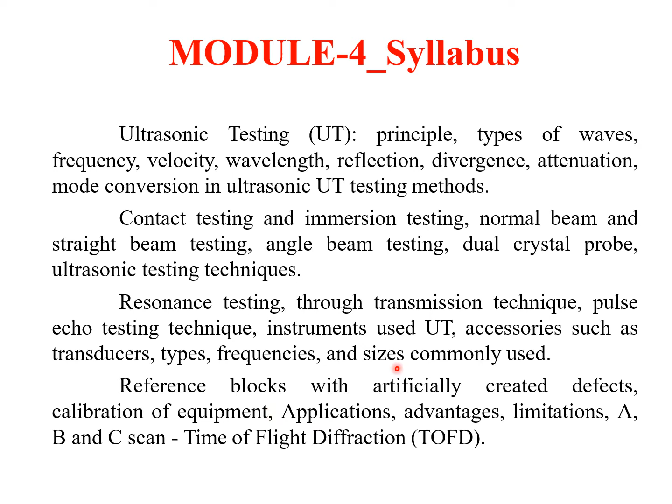So in the previous videos we've been discussing details about ultrasonic testing methods, and we covered the different types of ultrasonic testing methods like resonance testing, through transmission technique, pulse echo testing, etc. Now in this current video lecture, we'll be discussing more about the other different methods such as contact testing, immersion testing, normal beam and straight beam testing, and the different types of scan or the result interpretation, and also the accessories and instruments that are used in ultrasonic testing methods.

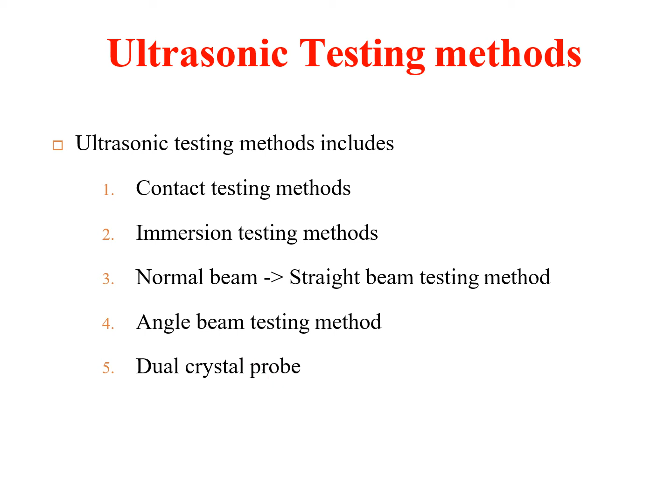Now, the different other types of ultrasonic testing methods also include contact testing methods, immersion testing methods, normal and straight beam testing methods, angle beam testing method, and dual crystal probe. First, we can move on to contact testing method.

In contact testing method, as you can see, you have a transducer here. The transducer is placed on the surface, and the transducer and the surface are separated by a layer of fluid. A thin fluid layer is provided between the transducer and the object, so as to remove the air in between them, so that better sound signals can be transmitted.

So in the contact type, as the name mentions, the transducer will be in direct contact with the object, but it will be separated slightly by a thin layer of fluid. That thin layer of fluid is acting as a coupling. It helps in better transmission of the ultrasonic waves into the test specimen.

Now, all the elements are actually protected inside a rugged casing. You have a very strong casing inside which all the transducer components are placed, and the wear resistance is very high. In order to improve the wear resistance, we have used wear resistant materials inside and also on the surface.

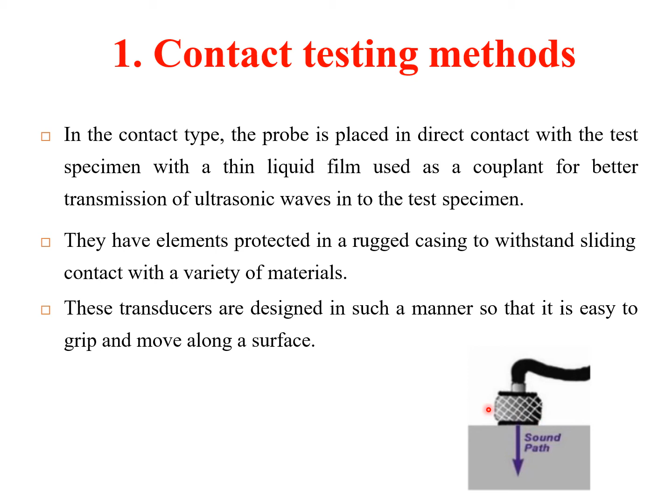Now the transducers are designed in such a manner so that it is easy to grip the transducer and move it along the surface, separated by a thin fluid film. Now we move on to the second one, which is called immersion testing method.

As we have mentioned before, in contact testing method, a couplant or a liquid is always provided, so that the air gap occurring between the transducer and the surface is removed, so that the sound waves can be transmitted better. So in immersion testing method, a waterproof probe is used, and it is placed at a certain distance from the test specimen.

This method provides better coupling. That is, it is immersed inside a fluid, so there is better coupling, and the strength of the ultrasonic signals that are transmitted can also be improved. So the main advantage is that they have uniform couplant conditions, so that longitudinal and transverse waves can be generated with the same probe and can be transmitted with the same intensity through the specimen.

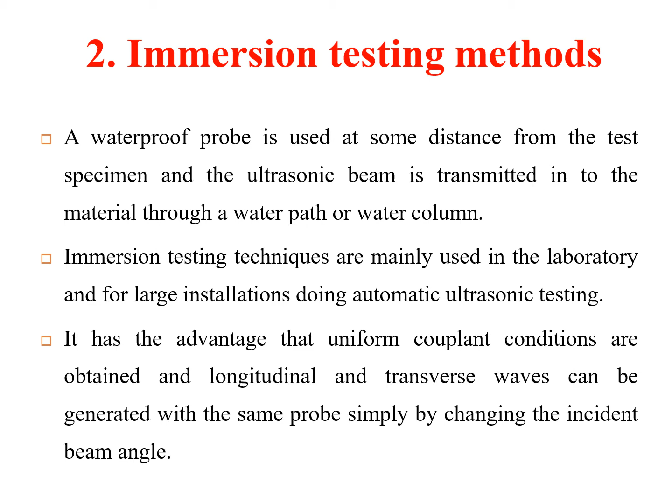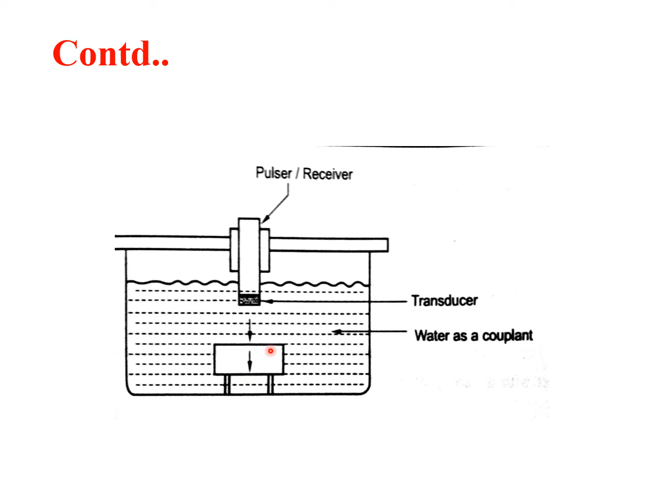Now it is used in cases where large installations are there, or also for laboratory techniques. This is the immersion testing method. You have a transducer which is waterproof, and water is acting as the couplant. This helps in removing the air so that sound signals can travel better, and transverse as well as longitudinal waves can find defects inside the specimen. Now we are moving on to the third method, which is the normal beam testing method.

Now, one of the issues with this is that not all defects are parallel to the surface. There can be defects which are inclined to the surface. Using this normal beam testing method, it is difficult to completely analyze defects that are inclined to the surface. So this is one of the main disadvantages.

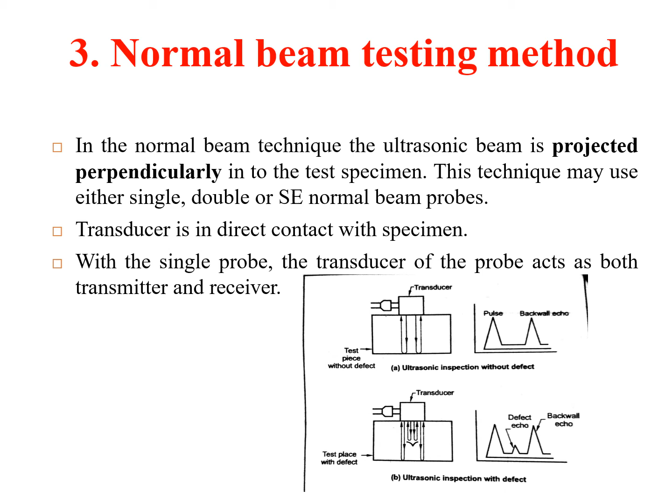Now here, the transducer of the probe is acting as both the transmitter and the receiver. So both transmitter and receiver are placed inside the transducer itself. Now the next one is the angle beam technique.

In angle beam technique, we can transmit ultrasonic waves into specimens not at right angles, but at any other angle. The preferred angle is always between 35 to 80 degrees. So this helps in detecting defects which are inclined to the surface at these mentioned angles.

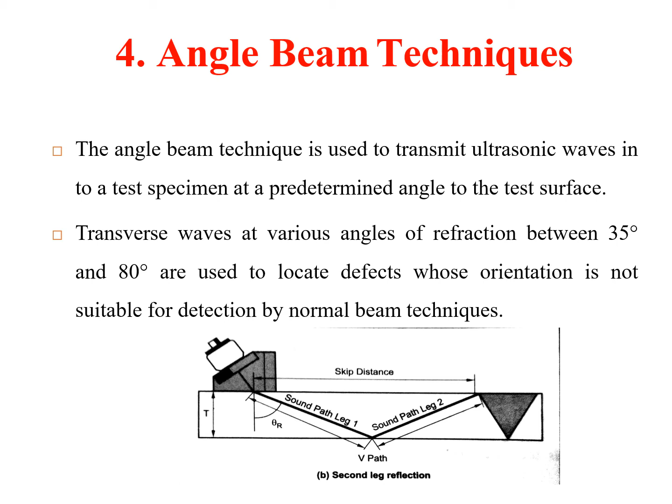So they can be used to find defects whose orientation is not suitable for detection by normal beam technique. That is, the defects that cannot be detected in normal beam techniques can be found out using angle beam technique. At an angle with respect to the vertical of 35 degrees to 80 degrees, we can send ultrasonic sound waves into the specimen to locate different types of defects. This is the angle beam technique.

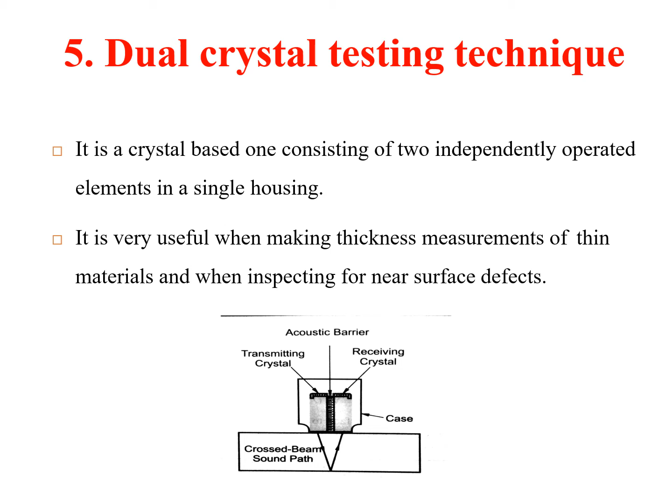One of the main disadvantages is that it can be used for only small thickness materials, and also for inspecting defects that are closer towards the surface, because the strength of the ultrasonic signals generated is low. So this is another type of crystal testing technique.

Now we have to introduce the concept of couplant. This couplant becomes prominent in contact testing as well as in immersion testing method. The main purpose of a couplant is actually to remove the air gap between the transducer and the test material, so that the sound signals can travel better with a higher intensity.

It is necessary in order to reduce the acoustic impedance mismatch between the air and the solid. There will always be an acoustic impedance mismatch between air and solid. So we need to remove this air. In order to remove this air, we can use couplants.

And the couplant displaces the air and makes it possible for more intensive sound energy to enter into the test specimen, so that we can get a better reflecting signal and we can find the defects easily. The main types of fluids that can typically be used are oil, glycerin, or water.

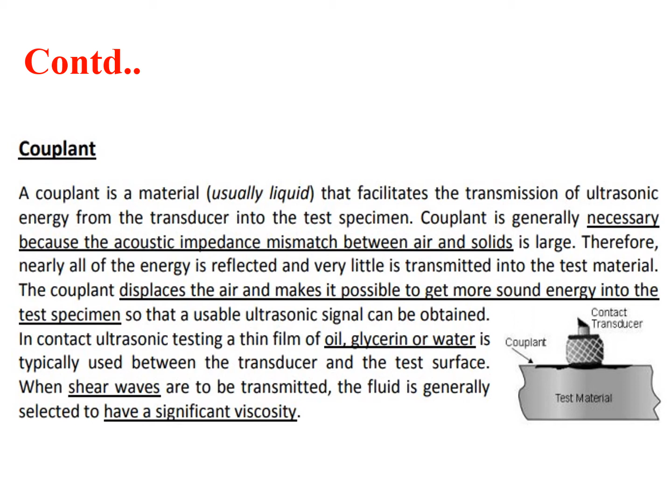And also, when shear waves are to be transmitted, the fluid that is used should have a higher viscosity. So among them, we can go for oil when shear waves are to be transmitted, so that the fluid will have a higher viscosity. We can transmit better sound signals into the material and we can get more accurate values.

Now we move to the equipment used in ultrasonic testing. The equipment for ultrasonic testing is actually very diverse. Three main components are used: transducers, instrumentation, as well as calibration materials. First, we move on to the category of transducers. Transducers come in different forms and shapes. The transducer is what creates the sound energy. They can act as the transmitter as well as the receiver.

These transducers are classified in a number of ways. As you can see on the screen, first, contact or immersion. Second, single or dual element, single crystal or dual crystal. Third, they can be normal beam as well as angle beam transducers.

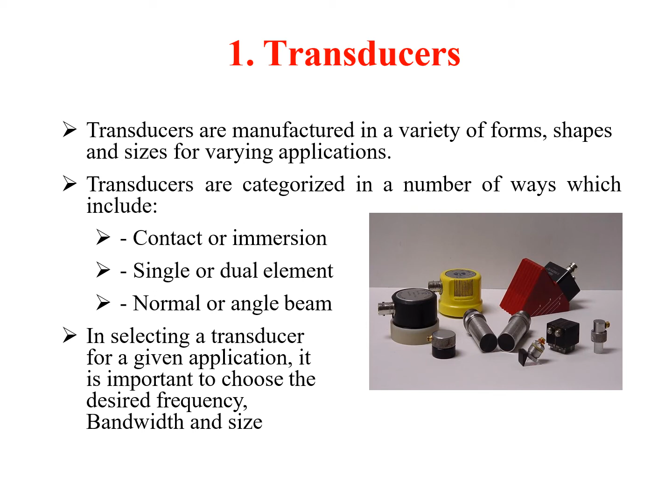So while selecting the transducer, we need to choose the desired frequency, because the ultrasonic sound wave always depends on the frequency. So based on the frequency, the bandwidth, and the size of the specimen, we have to choose the transducer. Now, first, we move to the contact transducer. This was earlier mentioned in the contact testing method.

Contact transducers are generally designed for vigorous use, and usually they have a wear plate on the surface. They are highly wear resistant, because the transducer needs to be moved along the specimen, and in order to develop resistance, you need to have a wear plate on the bottom surface. And different ergonomic designs are also planned for ease of gripping while scanning along the surface. So these are all the categories of contact transducer.

You have a case, the epoxy resin, the piezoelectric element that helps in generating the sound waves. You have the electrodes, the backing material. You have the signal wire. You have the wear plate at the bottom that is highly wear resistant, since the transducer has to be moved along the surface.

This is one of the types of transducer. And also, the contact transducers are available in two piezoelectric crystals. In dual crystals, we have learned it: you have a transmitting as well as a receiving crystal. Two piezoelectric crystals are there in one housing. These are called dual element transducers. One is acting as a transmitter and the other is acting as a receiver.

Now, this arrangement improves the surface resolution. That is, the defects that are closer towards the surface can be easily identified, and the resolution of that surface also improves. And also, one of the main disadvantages is that the thickness of the specimen is always limited. We cannot go for high thickness materials. And also, we can use these methods for finding the thickness of the material.

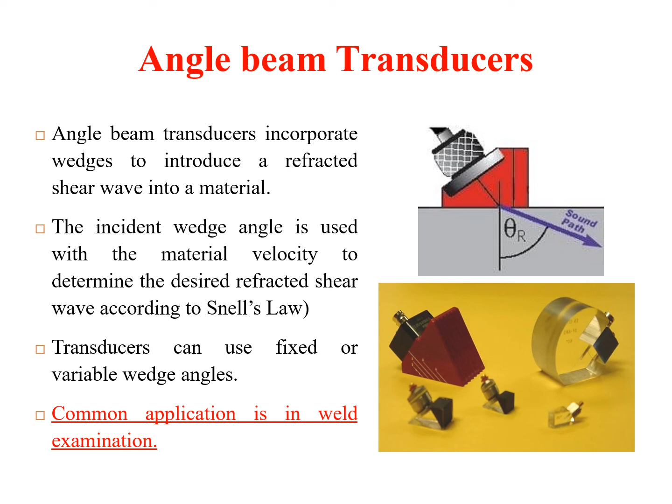Next come the immersion transducers. Immersion transducers are designed to transmit sound waves where the transducer and specimen both are immersed in a liquid. We have discussed this technique before. We have a uniform couplant medium, that is, the transducer is waterproof and the workpiece here; both of them are inserted in a particular fluid. The type of fluid depends on the frequency and test size of the specimen, etc.

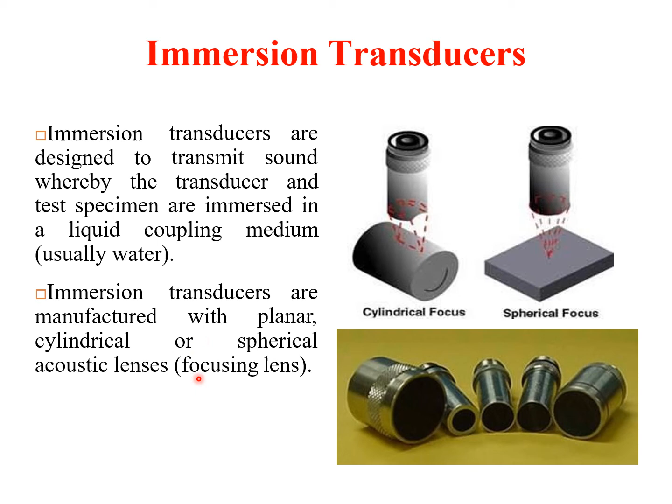Now, since both of them are waterproof and the air is removed, you can send better sound signals. So these are called immersion transducers. These immersion transducers are made in different shapes, such as planar, cylindrical, or spherical acoustic lens shapes. Now we move on to the second category.

This is the instrumentation. The ultrasonic equipment is usually purchased to satisfy different inspection conditions. That is, it is not only used to find out the defects, but in certain cases it can also be used to inspect certain other things, as well as find the thickness. And the test equipment can be classified in a number of ways. It can be portable, which can be transported very easily, or it can be stationary. It can be contact type or immersion type. It is manually operated or completely automated.

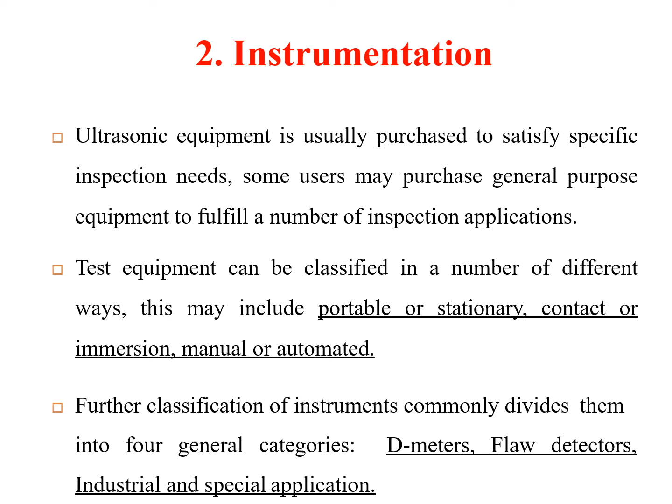And also there are further classifications; some examples are D meters, flaw detectors, industrial and special application instruments, etc. Now we'll move on to one of them, which is the D meter or the digital thickness gauge. It is used to find out the thickness; that is its basic purpose. D meters or digital thickness gauge instruments provide a digital readout. They are designed primarily for corrosion and erosion inspection applications, to find the extent of corrosion on the surfaces. Some instruments can provide the users with both the digital readout as well as a signal display.

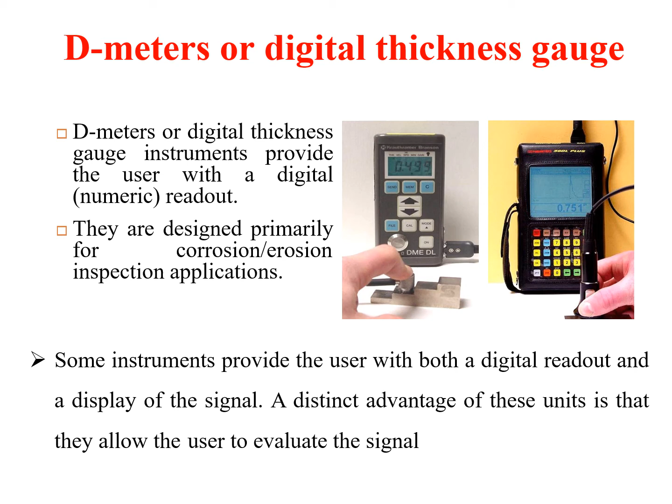The distinct advantage of these units is that they allow the user to evaluate the signal also. So these D meters can be used to find defects inside a material and can even be used to find out the thickness of certain materials. This is one of the instruments. Okay, now we move on to the calibration standard.

So before stating the calibration standard in ultrasonic testing, we need to know what calibration is. Calibration is a process in which a certain instrument is configured to known values. For example, take the case of a simple thermometer. It is a calibrated instrument, so when you use a thermometer to find temperatures, you can directly get the values, because it has been calibrated with proper standards. This calibration provides the inspector with a means for comparing test signals to known measurements. So we can compare the test signals whose value we know to unknown measurements, from which we can get the values.

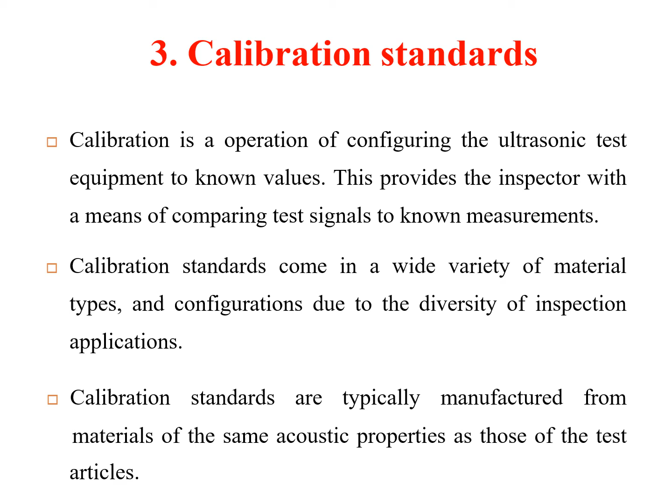Calibration standards come in a variety of material types and configurations due to the diversity of inspection applications. In ultrasonic testing, these calibration standards are typically manufactured from materials having the same acoustic property as that of the test specimen.

So different calibration devices are used. Thickness calibration standards are used to find the thickness. They may be flat or curved for pipe and tubing applications. They consist of simple variations in material thickness.

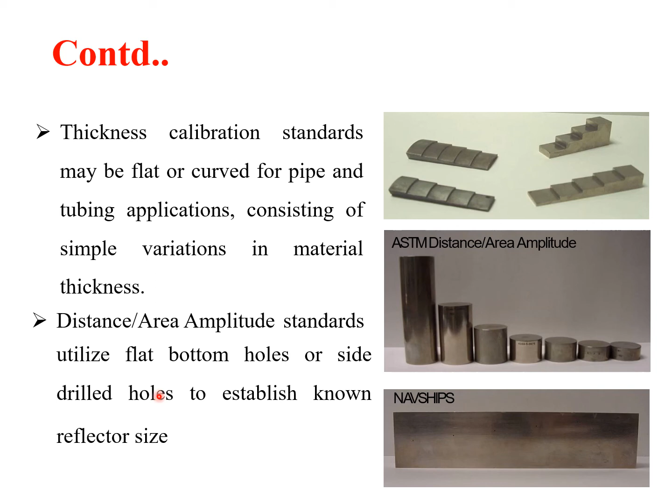There are also distance area amplitude standards. You can use flat bottom holes or side drilled holes. And also certain calibrations are used for angle beam inspections.

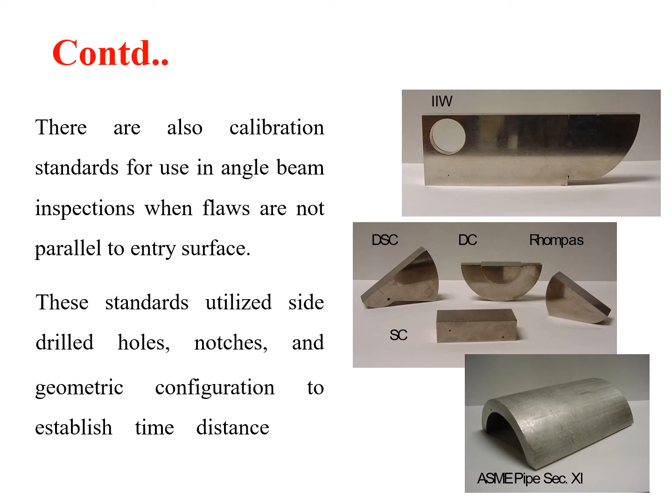When you are using angle beam inspections and the flaws are not parallel to the surface, different angle beam standards can be used. And also for these standards, we can use drilled holes, notches, and geometry configurations. So all these are different calibration standards that are used in ultrasonic testing.

Finally, we move on to the data presentation part. That is, you have already performed ultrasonic inspection and you have received different types of data. How can you represent or interpret that the defect is like this, the defect has this much thickness, or it's at a depth from the surface?

Now, the relative discontinuity size can be estimated by comparing the signal amplitude to that from a known reflector, that is the back echo, the back signal echo. The reflector depth can be determined by the position of the signal on the horizontal sweep. So you can get it in the form of energy. This is called A scan.

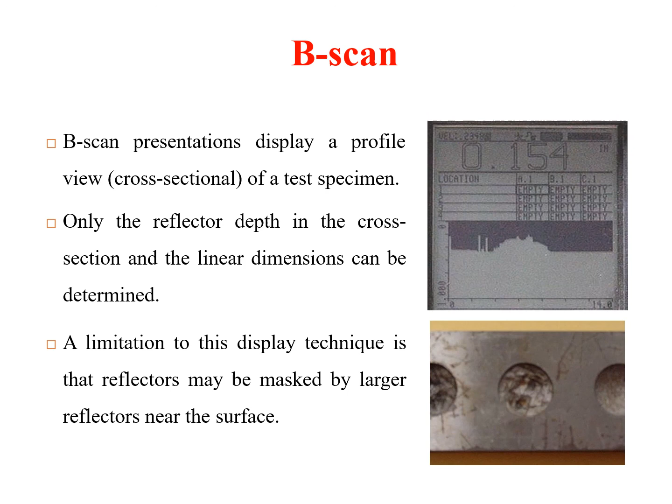There is a limitation to this display technique: reflectors can be masked by larger reflectors near the surface. So it's actually a two-dimensional representation. Now we're going for a C scan, which is actually a three-dimensional representation.

The C scan presentation displays a plan type view of the test specimen and also the discontinuity. So here, we are taking the image of the test specimen from the top, and we will be getting an idea. So the plan type view of the test specimen and the discontinuities are obtained.

The C-scan presentations are produced with an automated data acquisition system. We are using a data acquisition system such as immersion scanning. The combined use of A scan along with B scan and C scan is common. That is, all three types, A scan, B scan, and C scan data are used

in order to evaluate thickness measurement. The thickness measurement can be done, and also the different defects that are located away from the surface can be determined using all three scans.

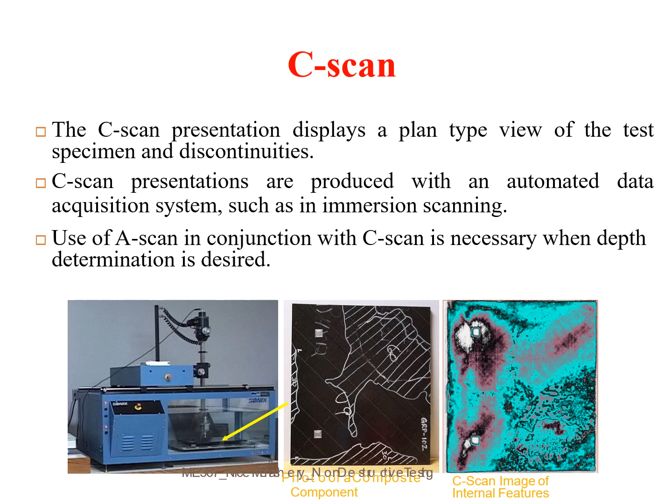Now we come to the end of this module. In the next class, we'll be taking the fifth module.